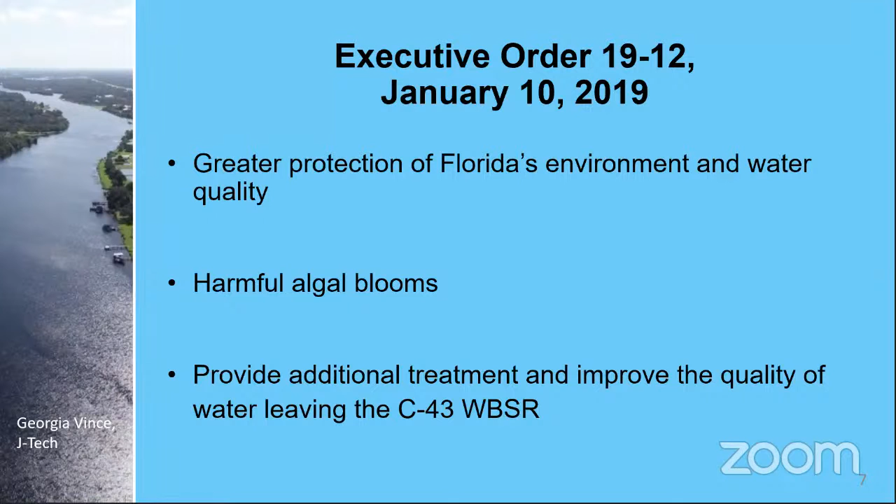The primary objective of the study is to identify opportunities to provide additional treatment and improve water quality leaving the reservoir. During the study, we identified and evaluated treatment technologies that may be implemented with the reservoir project, with the ultimate goal being to identify at least 3 alternatives.

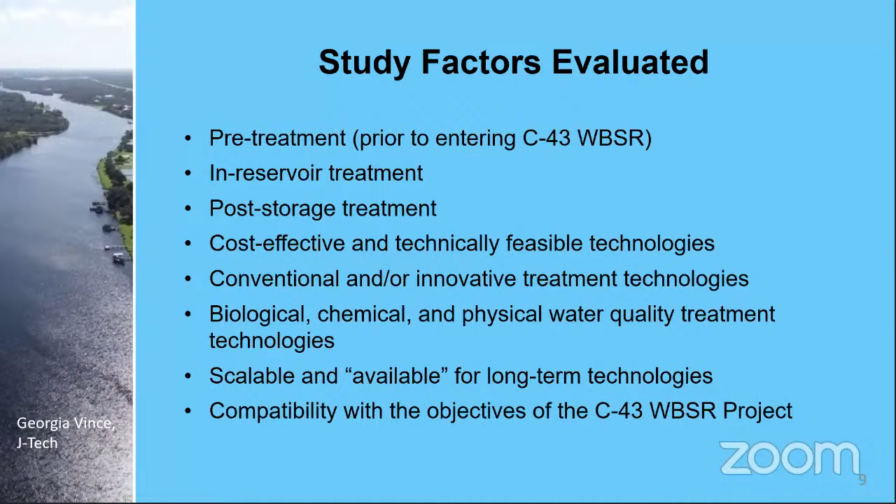The study evaluated pre-treatment opportunities prior to entering the reservoir, in-reservoir treatment, post-storage treatment, or water leaving the reservoir. We ensured the technology is cost-effective and technically feasible, evaluating both conventional and innovative treatment technologies. We considered biological, chemical, and physical water quality treatment technologies. The final alternatives must be scalable and available for long-term operation, and must be compatible with the objectives of the C-43 reservoir project.

The working group and consultant team identified constraints for the feasibility study. The identified alternatives cannot affect the congressionally approved C-43 West Basin Storage Reservoir project purposes, benefits, infrastructure, construction schedule, or operation, and the available project lands have not been specifically identified for the study. The C-43 reservoir and the selected treatment components are not intended to achieve full compliance of the Caloosahatchee River TMDLs for the basin.

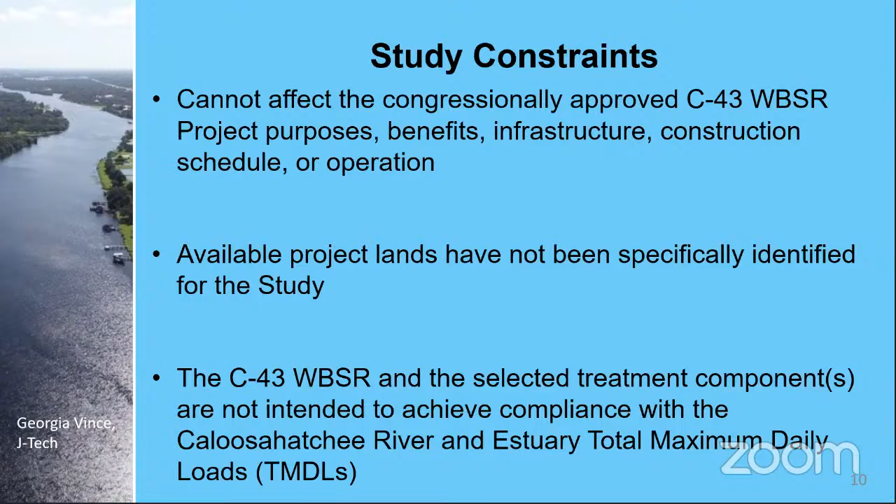The project was initiated in July of 2019, and we have had several public meetings as the project has progressed over time. We have incorporated feedback and public input from those meetings throughout the process, and we have finalized the feasibility study and will be presenting our results and next steps to you today.

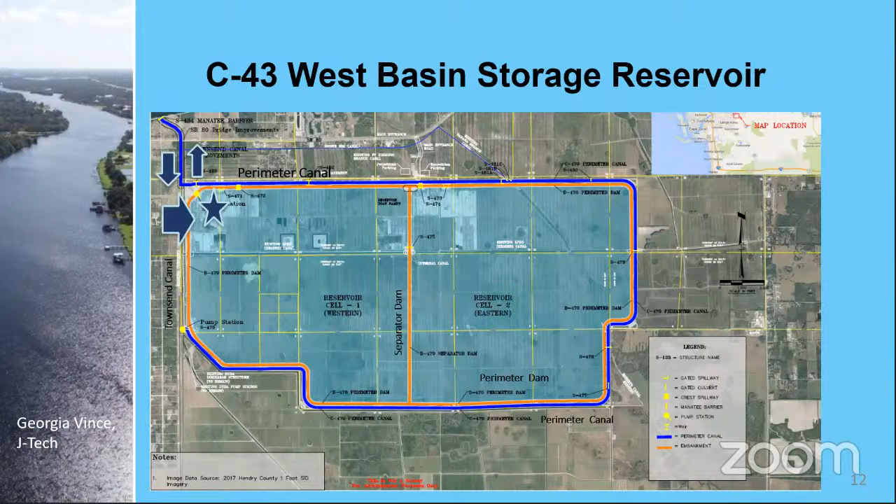A little history on the C-43 West Basin Storage Reservoir: it's a component of the Comprehensive Everglades Restoration Plan, and the project is funded by annual Florida legislative appropriations, and the U.S. Army Corps of Engineers will credit eligible project costs.

The purpose of the reservoir is to capture excess basin runoff and Lake Okeechobee releases to store water to improve the quantity, timing, and distribution of discharges to the Caloosahatchee estuary. Another purpose of the project is to maintain water supply for existing users.

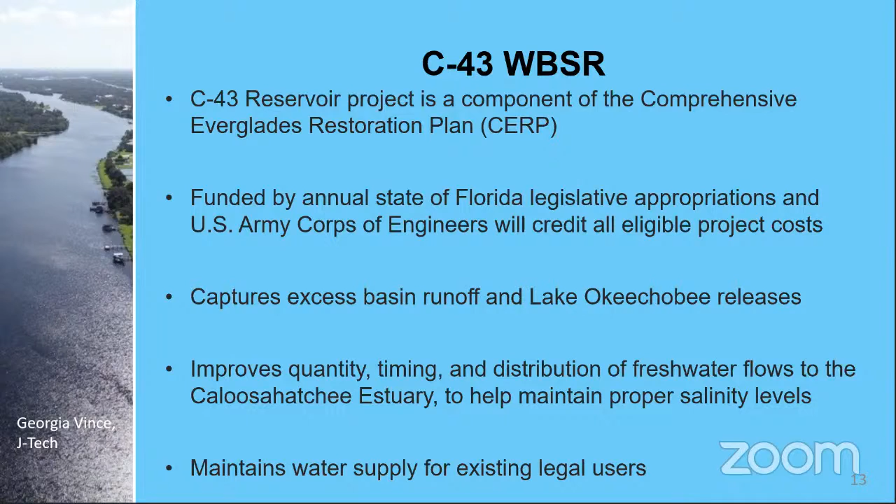The C-43 reservoir is located in Glades County or Hendry County along the C-43 river or canal west of Lake Okeechobee, between the Ortona and upstream of the Franklin Locks, just east of the Townsend Canal. This is a 10,500 acre project that will provide above ground storage.

Flows from the river will be directed down to the Townsend Canal and into the reservoir. When the river and estuary call for it, water that is stored will be discharged through the Townsend Canal and back into the river and estuary.

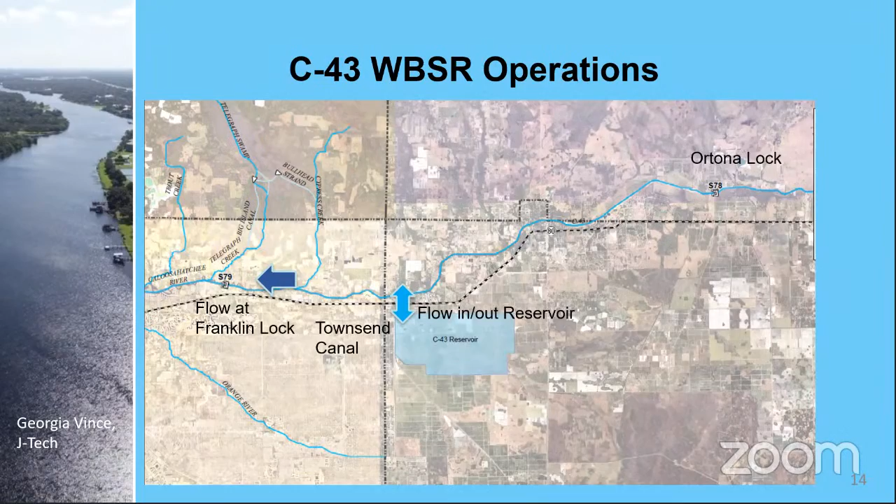Marcy Frick will now discuss treatment technologies that were evaluated for the study.

Our search for appropriate treatment technologies is focused on three primary water quality parameters: nitrogen and phosphorus, which are the nutrients that drive algae growth, and total suspended solids, which includes both algae and organic matter. Nitrogen exists in multiple forms, which vary in their availability to algae, including organic nitrogen and inorganic nitrogen that includes ammonia and nitrate. Phosphorus occurs in dissolved and particulate forms, which have different mechanisms for treatment.

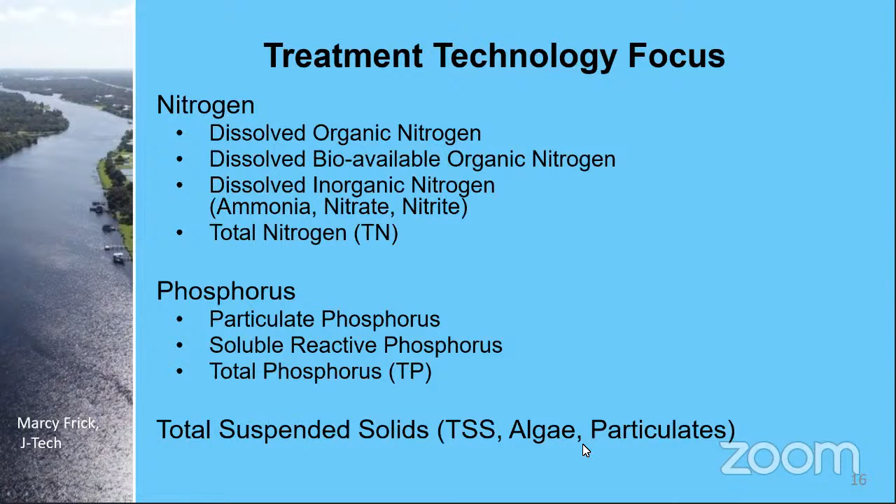Natural systems use the same chemical and biological processes for treatment as conventional systems. Where conventional systems build tank-based treatment reactors of concrete and steel and move water and add compounds using electricity and chemicals, natural treatment systems are typically land-based systems that rely upon gravity flow and natural plant, soil, and microbes to provide the media and biological habitat that sustain these processes at natural rates.

As a result, fewer staff are required to operate, and less time in the field is needed for maintenance, and monitoring processes are reduced significantly, and fewer residuals are produced. This often means lower long-term unit operational cost per pound of nutrient removal for natural systems.

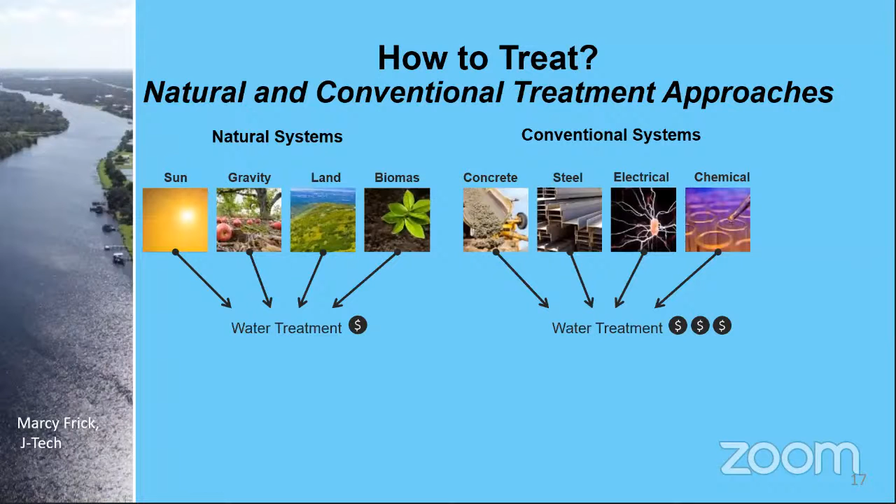For our technology evaluation, we evaluated them using key attributes. These attributes included whether Florida case studies were available and whether the data were suitable for analysis, nutrient removal data, and to what extent it could be used to scale up to treat large flows associated with the reservoir.

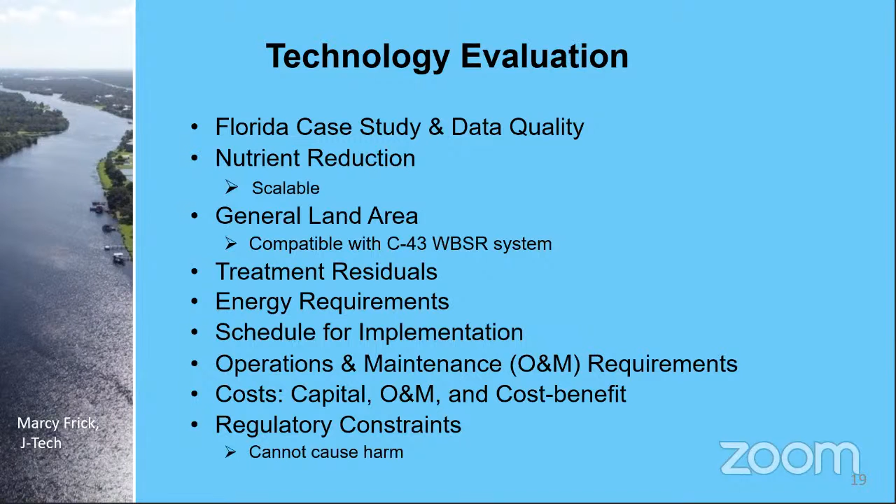The general land requirements and whether its features were compatible with the reservoir system and location, if treatment residuals are produced and how they would be managed, the amount of energy required, the schedule for implementation, operations and maintenance or O&M requirements, general costs for construction, O&M, and cost benefits, as well as regulatory constraints with the provision that the technology cannot harm the environment.

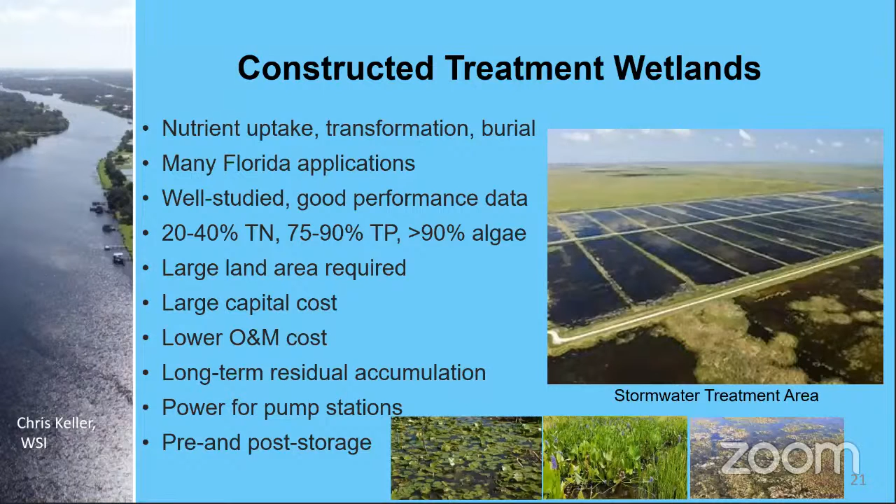Treatment wetland for the C-43 reservoir is one of the technologies that could be used either before water is delivered to the reservoir or after water is discharged from the reservoir before it returns back to the C-43.

The next technology is sand filtration, which involves the gravity separation of particles such as algae and suspended solids in the water column by forcing the water to drain through a bed of sand or other media.

Sand filtration is one of the technologies that we consider to be a passive system or a natural technology, because other than needing energy for pumping, there are no other external energy or chemical inputs required to make these types of systems work. There are a few applications of this technology in Florida. The largest is currently under construction for the phosphate industry in Central Florida.

The general removal efficiencies for total nitrogen are similar to those for treatment wetlands at about 20 to 40%. They run at about 25 to 50% reduction in phosphorus concentrations and over 90% for suspended algal solids.

Similarly to treatment wetlands, sand filtration generally requires a large land area, therefore likely to have correspondingly large capital costs for land acquisition and construction. Again, because these are a passive system and only rely on electrical costs for pumping, they have generally lower operations and maintenance costs compared to conventional technologies.

The primary operation and maintenance activity for these, besides pumping, is the periodic replacement of the upper layers of the sand every 3 to 5 years. As with the treatment wetlands, this is one of the technologies that could be applied before or after the water enters the reservoir.

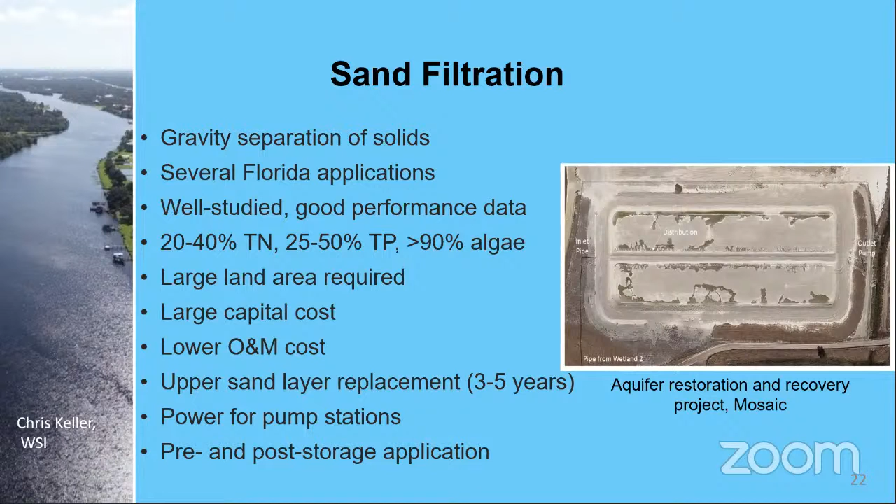The last one that I'm going to discuss is the hybrid wetlands treatment technology, which combines the physicochemical processes of coagulation with the natural settling and uptake processes that occur in treatment wetlands.

In this particular example, a coagulant such as alum, which you'll hear more about in a moment, is dosed to bond with nutrient ions and form particles that then settle out in wetland basins. There are several successful applications of the technology in Florida.

Sorry for that delay.

The removal efficiencies range from about 50 to 60% for total nitrogen, 80 to 90% for total phosphorus, and over 90% for suspended algal solids. Because they're enhanced or intensified by adding chemicals, they require reduced land area and reduced capital costs compared to constructed treatment wetlands. The requirement for chemical addition, however, increases their O&M costs in comparison to treatment wetlands. They do generate solids that require periodic removal and disposal, and these hybrid wetlands can be used to treat water either before or after storage in the reservoir.

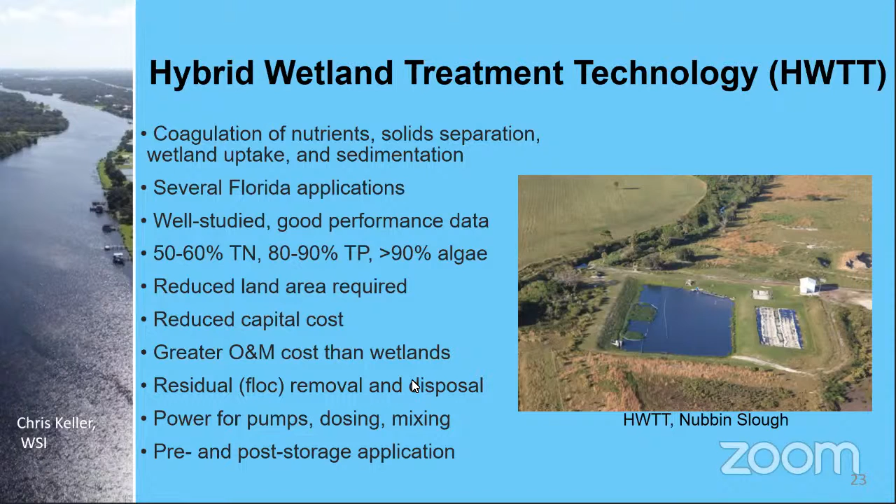With that, I'll hand it over to Jim to discuss the remaining technologies. Thanks, Chris. I'll be speaking first about alum treatment, picking up on Chris's connection there.

For coagulant treatment using alum, it's used commonly to coagulate nutrients by particle charge neutralization and solid sedimentation in offline lagoons or within the reservoir. This approach has a long and successful history in Florida and is well studied with ample performance data from full-scale facilities such as the Nutrient Reduction Facility in Lake County.

Removal rates are typically high for nitrogen, in the range of 50 to 70%, and very high for phosphorus, in the range of 50 to 90%, with over 90% algal solids removal. The land area requirement is relatively small and consists primarily of settling basins, chemical storage, and solids dewatering and drying facilities. The O&M cost is moderate to high given the continuous need for chemicals and management over time. The removed floc requires dewatering and storage, which is the largest open concern over the long term. Power is required for pumps, dosing, and mixing.

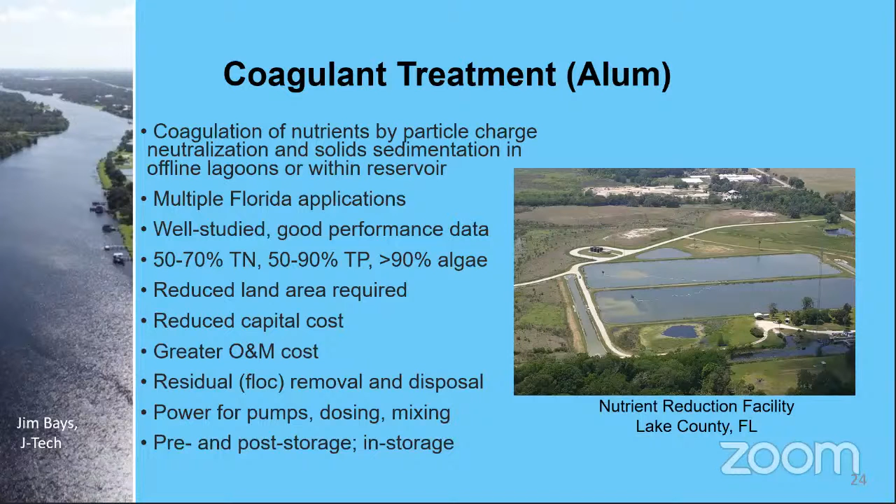The next technology is electrocoagulation. It's the same principle, but a different method of treatment. Electrocoagulation, or EC, is the coagulation of nutrients by electrode particle charge neutralization and subsequent solids sedimentation. The system is relatively new to Florida, with limited Florida case studies.

The studies have shown that this approach has consistently high removal of nitrogen, phosphorus, and algal solids, typically up to 90%. The system would be relatively compact with low land area required, but would have a high capital cost and a high O&M cost. One benefit of this approach is lower residuals production compared to alum treatment, for example, but it still generates solids that require disposal. Power requirements are high to operate the system, pumps, and related machinery and equipment.

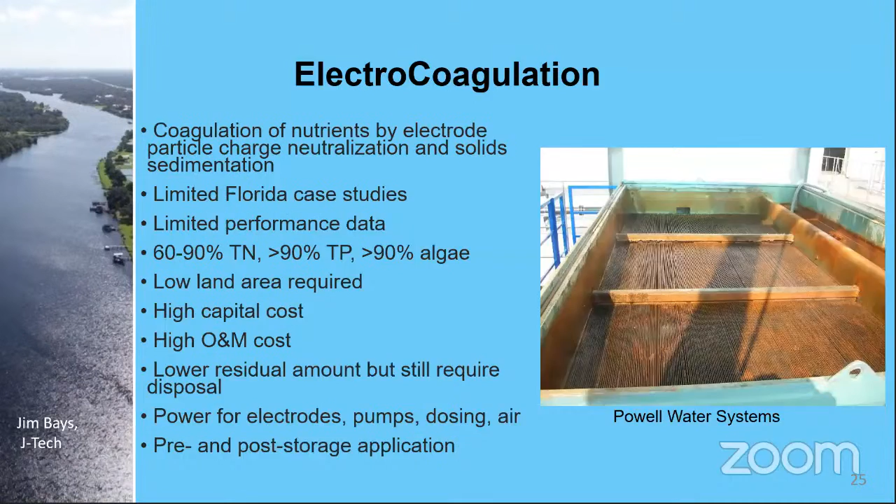Bold and Gold is a sorption media developed by the University of Central Florida that uses a mix of sand, tire crumbs, and clay particles to absorb and filter nutrients in engineered basins. There have been over 200 applications in Florida, and performance data indicate potential total nitrogen removal ranges of 75 to 90% and total phosphorus removal of 50 to 90%.

Media beds are relatively small and require a moderate area. The spent media must be replaced over time. O&M costs are relatively high because of the replacement costs, but other operational needs are minimal.

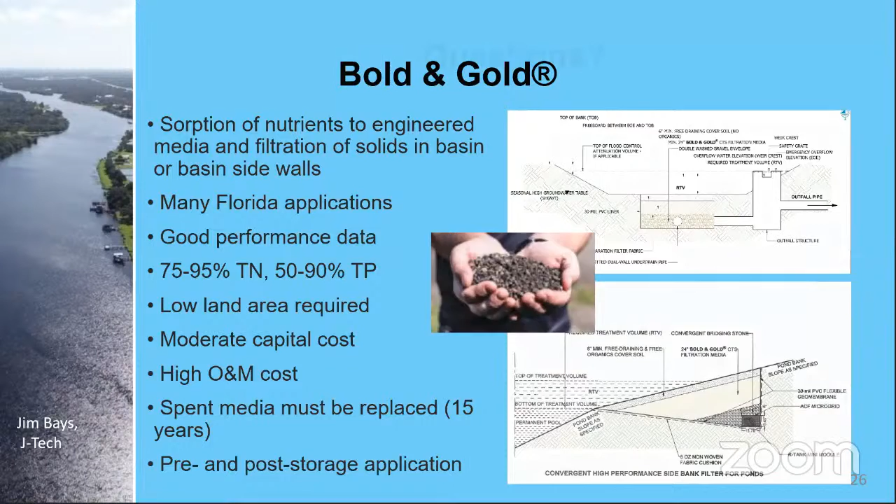And I think that's it for us on the overall technology review, and we'll take some questions now.

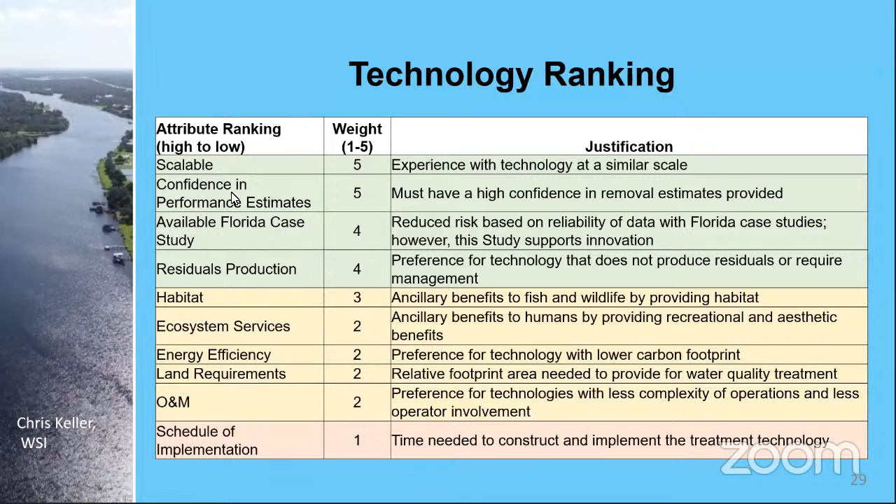So the top 10 technologies are shown there on the left-hand side, ranging from treatment wetlands down to the NutriGone media. Those attributes from the prior slide, with the same color scheme, are shown across the top of this graphic. The consulting team, with input from the working group, developed scores for each technology and for each of these attributes that range from 0 to 2, with 2 generally being the preferred, highest score, and 0 being the least.

Those scores were then multiplied by the weights to come up with the overall scores shown in the second to last column on the right. We see that treatment wetlands came out with the highest overall score at 54, ranked number one for these non-cost and non-nutrient removal attributes.

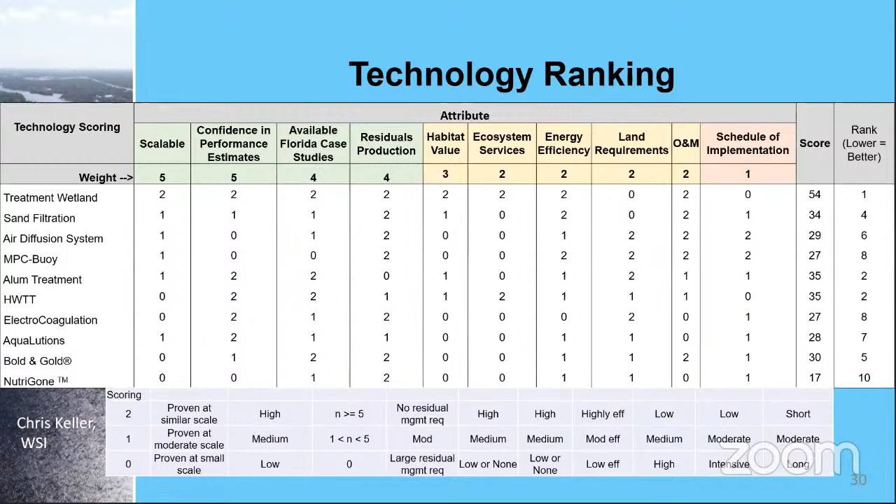Next slide. This slide presents that same information, but in a different form, with the rankings shown at the ends of the blue bars and the attribute composite scores shown by the length of the bar. So that 54 that treatment wetlands received on the previous slide is reflected in the length of that bar. You see how those individual technologies fell out, with treatment wetlands ranking first, Alum Treatment and the hybrid wetland treatment technology tying for second place, leaving sand filtration in 4th and Bold & Gold in 5th.

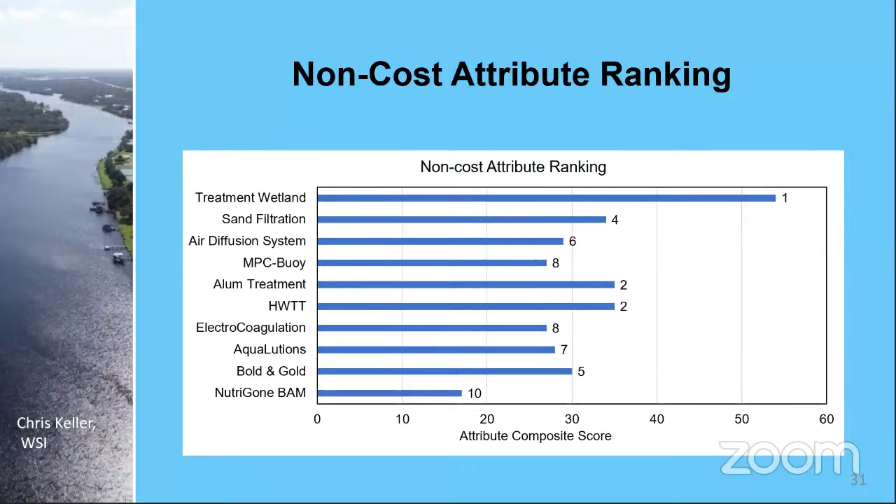Next slide. So in order to take the next step and begin to evaluate these top 10 technologies and compare them in terms of their ability to provide a necessary level of water quality treatment, the consulting team and working group developed some design objectives based on an analysis of actual historical water quality in the C-43 canal.

What the team came up with was objectives for each of these technologies to be able to reduce total nitrogen from 1.5 to 1 milligram per liter, total phosphorus from 0.16 to 0.08 milligrams per liter, and total suspended solids from 20 to 10 milligrams per liter. These improvements in water quality would have to be provided for a flow of 457 cubic feet per second.

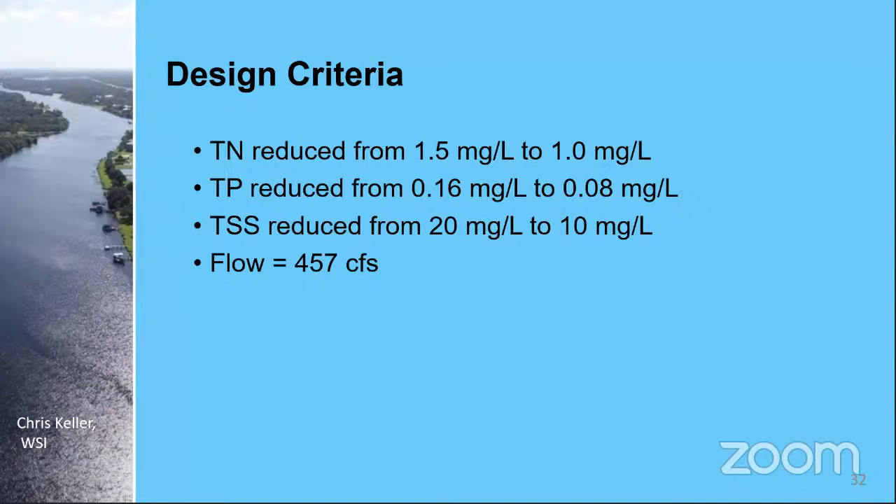Next slide. As I mentioned, each of the technologies was sized based on those design objectives to achieve those minimum design goals of reducing the TN, for example, from 1.5 to 1 milligram per liter. Total masses at those flows of 457 cubic feet per second were summed over a 20-year planning period.

And those were combined with net present value capital and operations and maintenance costs, excluding the acquisition of land and the conveyance infrastructure necessary to deliver water to each of these technologies, to develop these overall cost effectiveness values for total nitrogen, total phosphorus, and total suspended solids.

So the attribute ranks from the green, yellow, and red graphic that I showed a few minutes ago are there in the second column, and the cost effectiveness for each of the water quality parameters of interest, total nitrogen, phosphorus, and suspended solids, are shown in the next three columns. The combined overall ranks, including cost effectiveness and the attribute rankings, are shown on the right-hand side.

In this case, we see that alum treatment ranked first, treatment wetlands second, hybrid wetlands third, Bold and Gold and sand filtration coming in fourth and fifth, and the rest of the technologies there in 6th through 10th place.

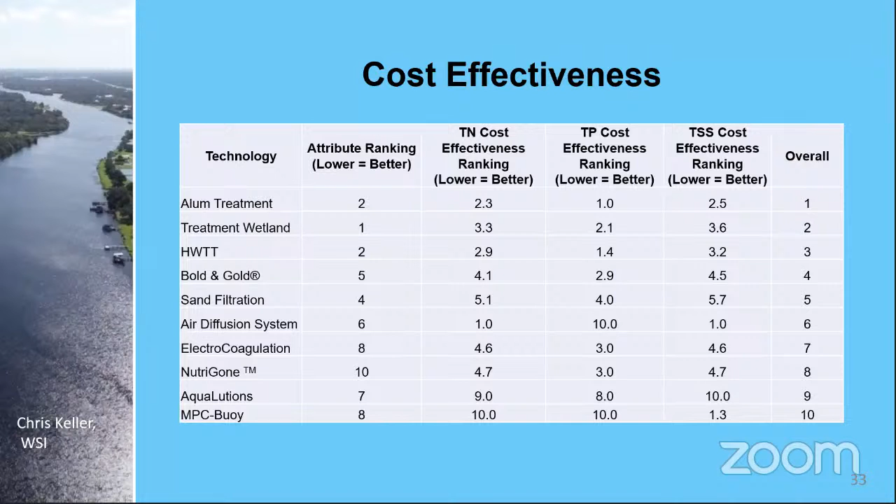Next slide. This is another presentation of that same data from the prior slide, but in this case looking at more of a scatter plot, where the attribute ranks, those non-cost, non-nutrient removal attributes, the composite score for those, are shown on the x-axis, the bottom scale, and the nitrogen cost effectiveness ranking, nitrogen being the key parameter of interest in the C-43 watershed, shown on the left-hand side.

So the take-home message from this slide is that those technologies that fall in that lower left quadrant, with low dollar per pound numbers for nitrogen removal and high rankings, being the lower scores for those other attributes, are the preferred technologies. Again, we see that the wetlands, alum, hybrid wetlands are firmly within that lower left quadrant, and the Bold and Gold and sand filtration are right there on the edges.

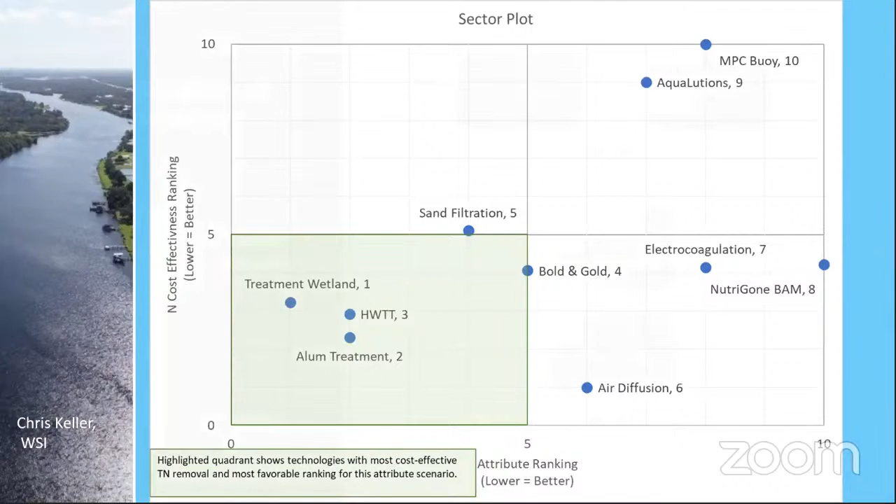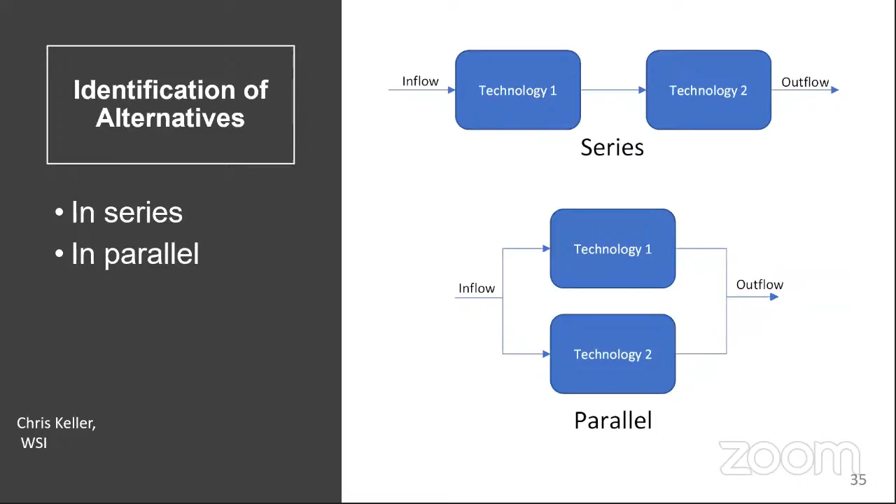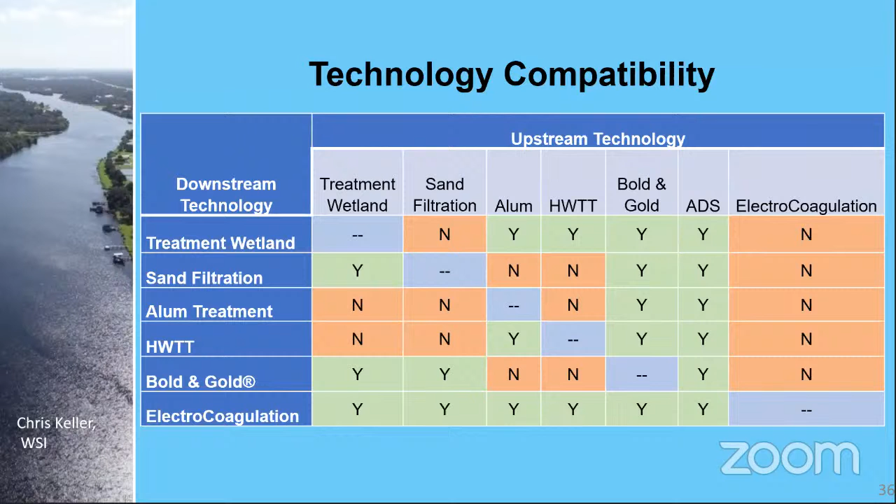So what we see here is that the alum treatment going across the top, towards the middle, where alum is shown in gray, the team felt that alum could be followed by a treatment wetland, or by a hybrid wetland system, or by electrocoagulation, but there wasn't any significant benefit in following alum treatment with either sand filtration or Bold and Gold. So that's kind of the approach to looking at the data in this chart.

So from the attribute ranking analysis we just showed there, we found that the STA, alum, and hybrid wetlands technologies achieved a balance of nutrient removal effectiveness while meeting desirable characteristics as a technology. However, there were other considerations that we knew were important. For one, is there enough land to meet the STA performance? And is there an opportunity to incorporate other innovative technologies, such as in a parallel or series combination?

So this led to the creation of combinations of technologies. For one combination, we proposed a treatment wetland to treat a portion of the flow and a Bold and Gold treatment bed to treat the remainder. So that would be a parallel configuration. This combination was sized conceptually as 1,000 acres for an STA, which was thought to fit within the known available area and would treat 20% of the target flow, and 104 acres for a Bold and Gold treatment system to treat the remainder.

Similarly, we considered a sand filter to replace the treatment wetland, which was estimated to be 200 acres, coupled with 104 acres for Bold and Gold treatment. And the intent of these technologies is to really drive to a passive operation, or as much of a passive operation as possible, while still meeting the performance. Finally, though, we did want to include EC into the considerations because of its high removal effectiveness, and it's perhaps the most highly controllable treatment system of all the technologies we've looked at here.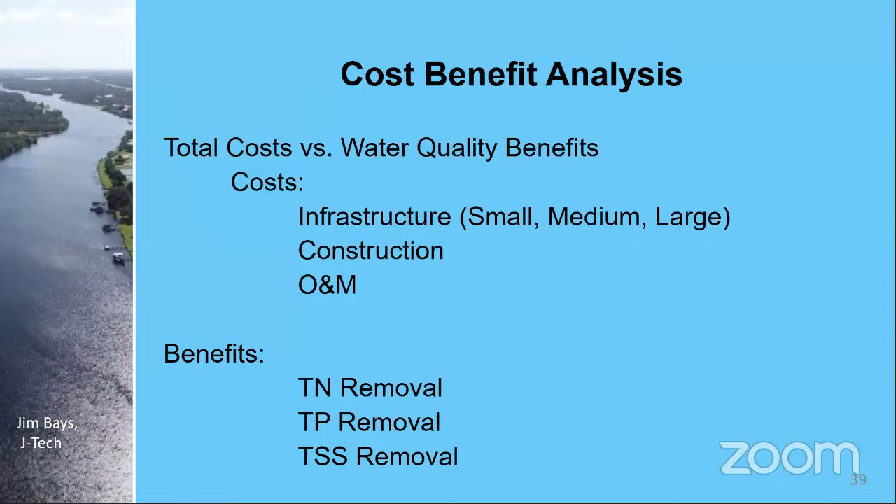This table shows the capital cost, annual O&M, and the net present value of the infrastructure cost. Capital costs range from $47.8 million for the hybrid wetlands to $164 million for the EC system. Operational costs showed a different trend, with wetlands and sand filter combinations having the lowest O&M costs in a range of $1 to $2 million, to $8.5 million per year for the hybrid wetlands. So that reflects the more passive operation of the wetland concepts and the lower cost associated.

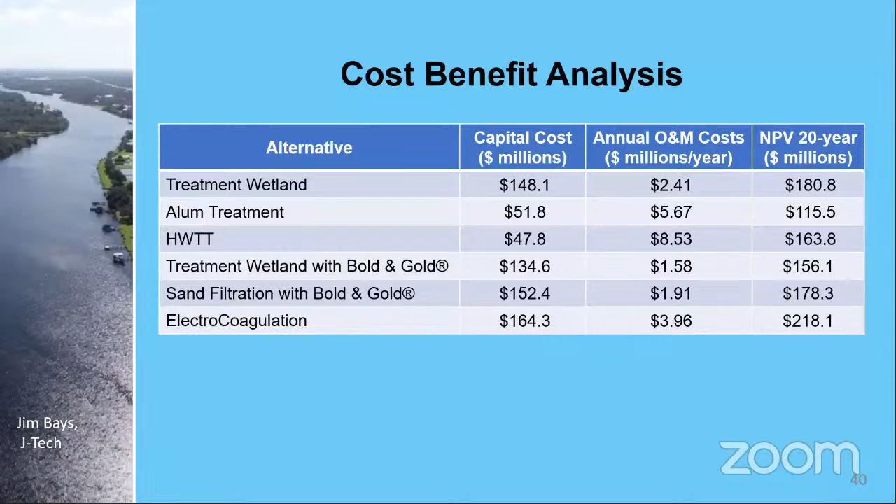We also factored in conveyance infrastructure costs, where we proposed that pump stations, conveyance channels, and access roads to support the treatment technologies would have 3 levels: small, medium, and large. Capital and O&M costs were summed over a 20-year period and annualized, and net present value costs ranged from $115 million for alum treatment to $218 million for the EC treatment. So these are long-term, 20-year accumulations of cost of the construction, the capital, and the construction includes the treatment system as well as the conveyance infrastructure.

Okay, this table shows the 6 alternatives compared by area, flow, and 20-year net present worth unit removal cost. The largest area requirement is for a full-scale STA at 5,000 acres, and the smallest is for alum treatment at 50 acres, with EC coming in close behind at 150 acres. The treated flows range from the analysis objective average of 457 CFS for the STA, alum, and hybrid wetlands, down to 325 CFS for the Bold & Gold alternatives, and the lowest flow at 229 CFS for EC. This difference in flows between technologies is because the technologies show greater removals than we specified. That is, they'll get to lower concentrations than we're targeting, given what we know about their performance. So those greater removals mean a commensurately smaller flow is treated, which is then blended with remaining flows. So we're really treating a side stream here to get to our total target outflow concentrations in our analysis.

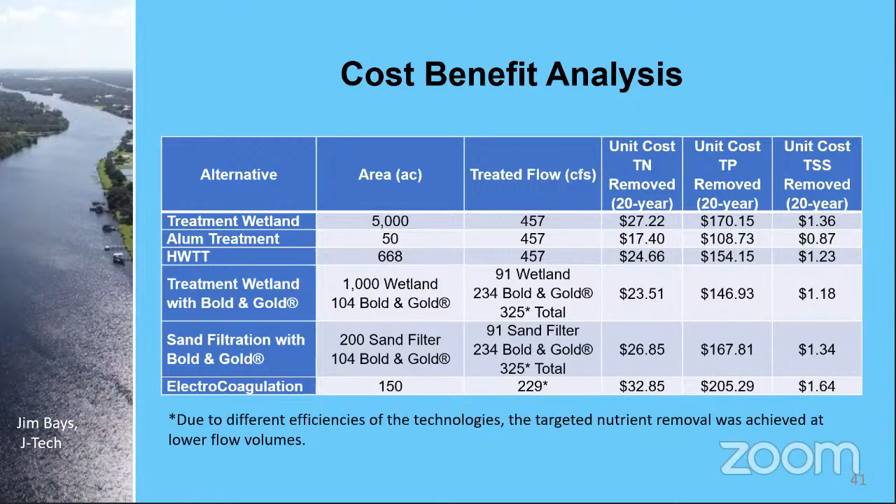This slide shows the unit cost data for each parameter in 3 graphs, with nitrogen at the top, phosphorus in the middle, and solids at the bottom. Each graph shows the unit cost data ranging from highest to lowest, top to bottom. Total nitrogen, the blue bars, ranges from $17 per pound removed for alum treatment to $33 per pound removed for EC. Total phosphorus, the orange bars, ranges from $109 per pound removed for alum treatment to $205 per pound removed for EC. Remember, this is the long-term capital and O&M cost over a 20-year period. Total suspended solids, the gray bars, range from 87 cents per pound removed for alum treatment to $1.64 for EC. So clearly the highest unit costs are with phosphorus removal.

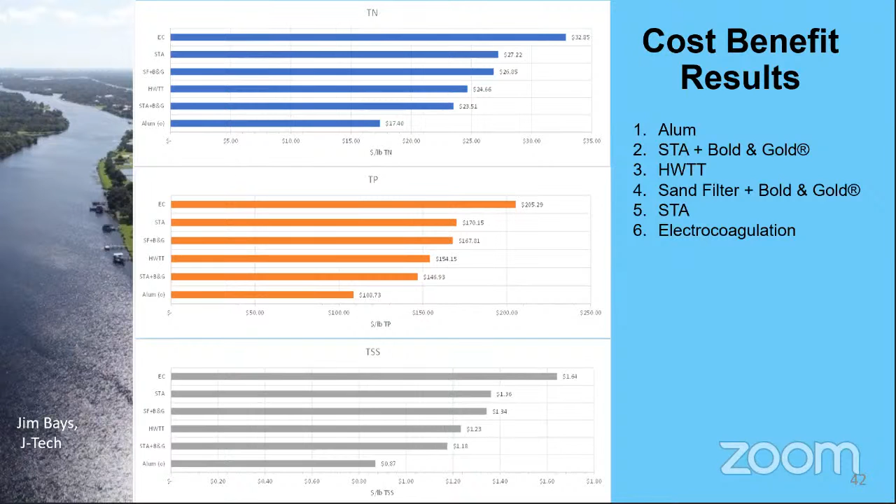The nitrogen ranges are lower than that. Alum treatment consistently showed the lowest unit cost, and these numbers are consistent with other operating systems, with a relatively large difference in unit costs between the other technologies. That is, alum is, generally speaking, significantly lower than the other costs. EC, electrocoagulation, proved to have a consistently higher unit cost over all the other technologies, even though it is a substantially more controllable system, and the operations can be more specifically defined for it.

Based on this analysis, alum treatment was ranked first, followed by a treatment wetland with Bold & Gold and hybrid wetland treatment technology, and then a sand filter with a Bold & Gold treatment bed. This set of alternatives represents technologies with proven track records, such as alum treatment and treatment wetlands, but supplemented with relatively new technologies such as hybrid wetlands and Bold & Gold. The relatively lower unit cost for alum treatment is consistent with actual performance of full-scale facilities, and a smaller footprint is required. The relatively greater unit cost for the remaining technologies are fairly similar, and land area requirements are considerably greater. So this is our recommended alternatives moving forward.

Okay, Georgia. Thanks, Jim.

We did get a question about alum toxicity in the receiving water body, and we've included some additional information in the feasibility study regarding this topic, as we receive this question often. I wondered if you'd quickly address that toxicity question. That is a fair question, it's been consistently raised over the years, but the operational history and performance of existing full-scale facilities operating at similar flows or concentration ranges don't show any toxicity impacts, and the concentration and dosage can be managed to prevent that from happening. It is definitely a consideration. The water chemistry of our water to be treated here also minimizes that potential, but it is our intention in the basis for the plan that we would not achieve toxic concentrations, and it would be managed to prevent that.

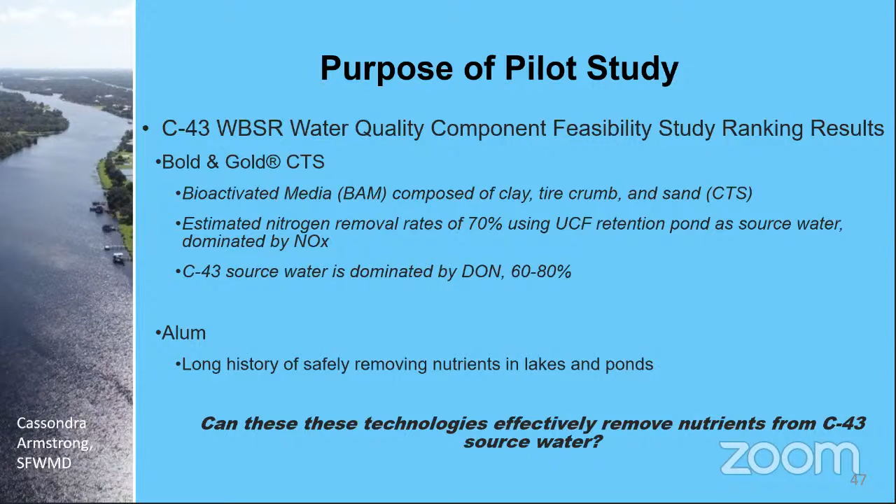For the Bold & Gold study, we used 6 of the mesocosm tanks out at BOMA. We filled 2 of those with the Bold & Gold media, 2 with sand only, and 2 are controls, which I'll explain in a bit. We then applied a continuous flow of the C-43 surface water to each of the tanks for about 1 month at a flow rate of 0.005 gallons per minute per square foot.

Now this is an order of magnitude lower than what Bold & Gold was using in the feasibility study. They had a 0.05 gallon per minute rate, so we're at a lower flow rate than that, so keep that in mind. We took very frequent, almost daily samples to try to capture what the nutrient removal efficiency curve might look like for this technology over time.

We were informed by the makers of Bold & Gold that there is a 90-day efficiency spin-up, so the initial performance of this technology is not likely to be its optimum performance. So also keep that in mind. What we are looking at here is just the first month, to try to see if it's improving with time. It'll represent the first flush of the system, like what it does when it's very first installed and implemented.

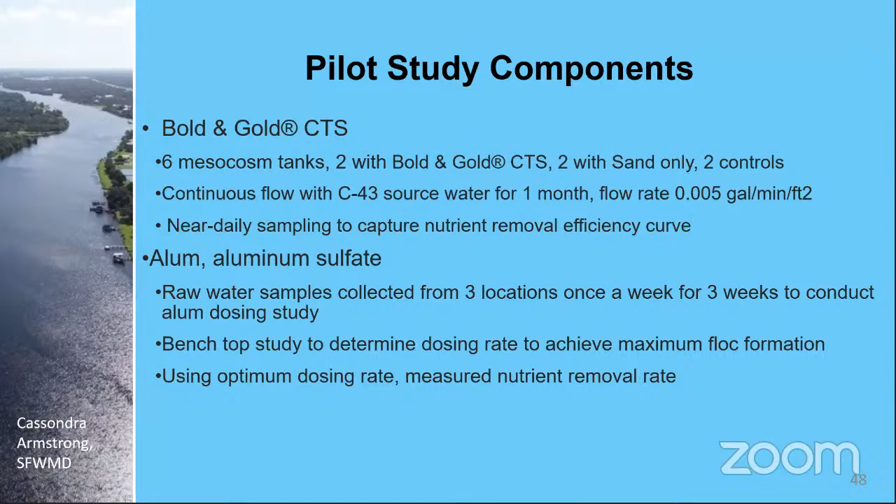The other technology we looked at was alum. We collected samples from 3 different locations within the watershed, at 3 different times, and sent that to a lab to do a benchtop study, what they call a jar study, where they tried to find out the appropriate dosing rate for the alum. Once they found the appropriate dosing rate, we determined what the nutrient removal rates were for that dosing. Let's go ahead and go to the next slide.

However, over the course of our 1-month time period, there were no lake releases at that time, so the BOMA site also represents what the watershed water component looks like. Go ahead and go to the next slide.

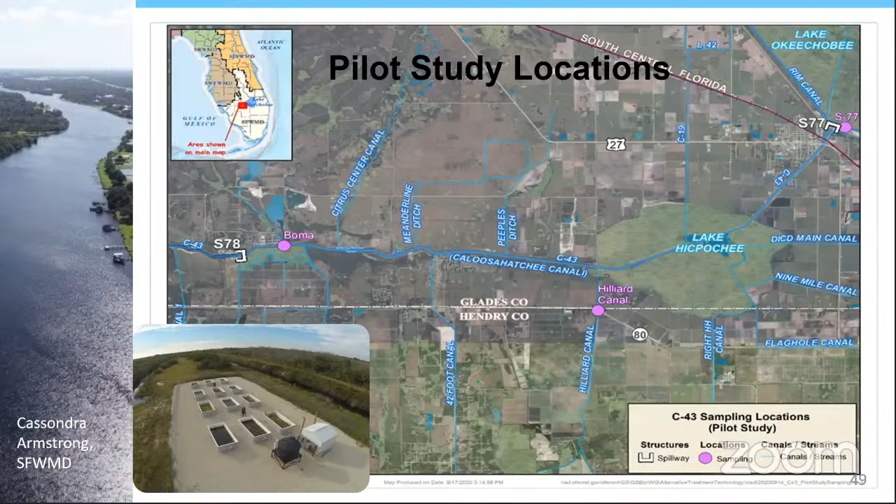For our control, this is where we stopped construction; it's just the red river rock and the geofabric on the bottom, and then we put the water into there, and that's our control. For the sand mesocosms, we put in 3 feet of sand on top of that geofabric, tamped it down so it was a nice tight density and consistency across the whole tank.

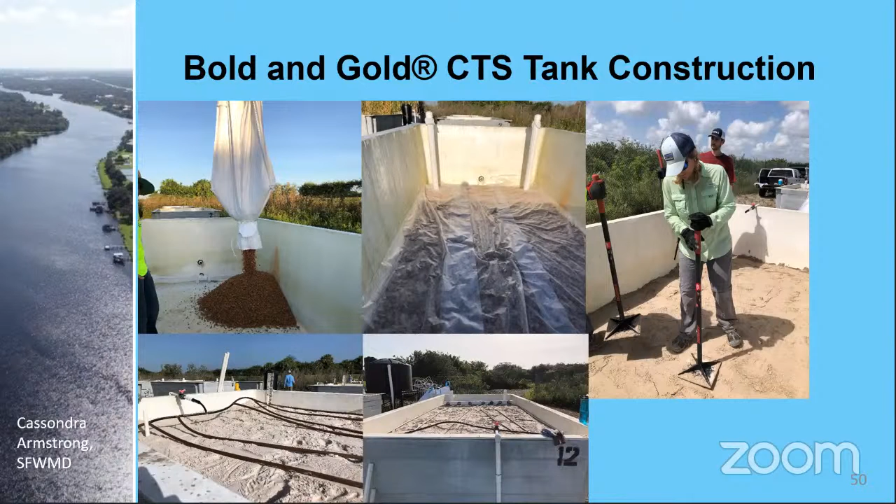For the Bold and Gold, it was 2 feet of Bold and Gold material capped with 1 foot of sand. The sand and the Bold and Gold were obtained from the same place, so it was all the same material throughout.

Once they identified the dosing rate, they took that water and analyzed it for the nutrients removed from the system. One thing to know is that the alkalinity of the water is very important. You need enough alkalinity to accommodate the alum dosing, because the alum dosing will actually lower the pH. Fortunately, the C-43 water was found to have adequate alkalinity to buffer the alum dosing.

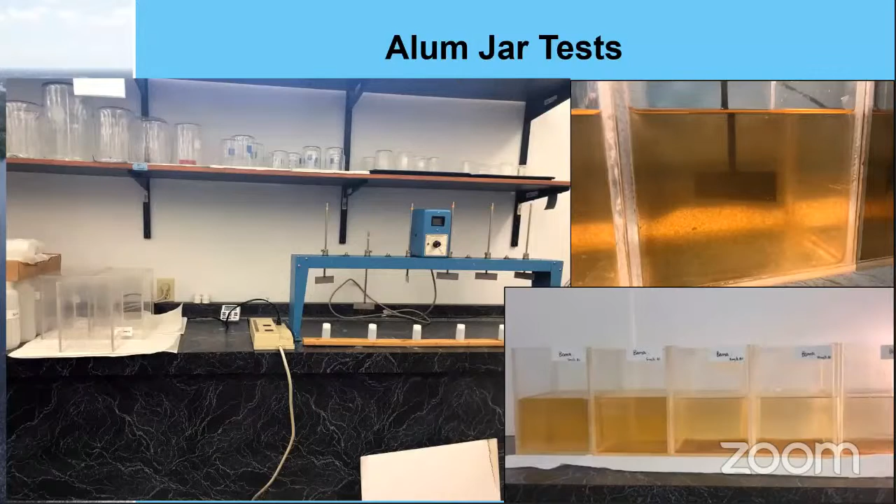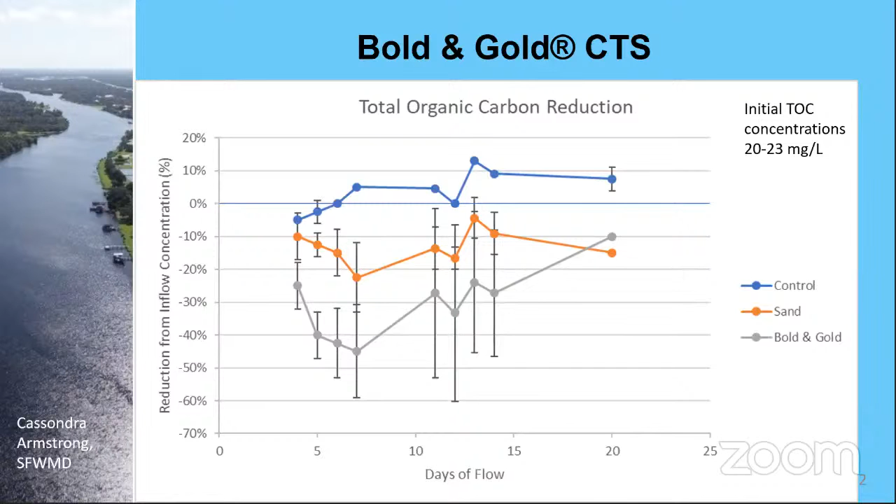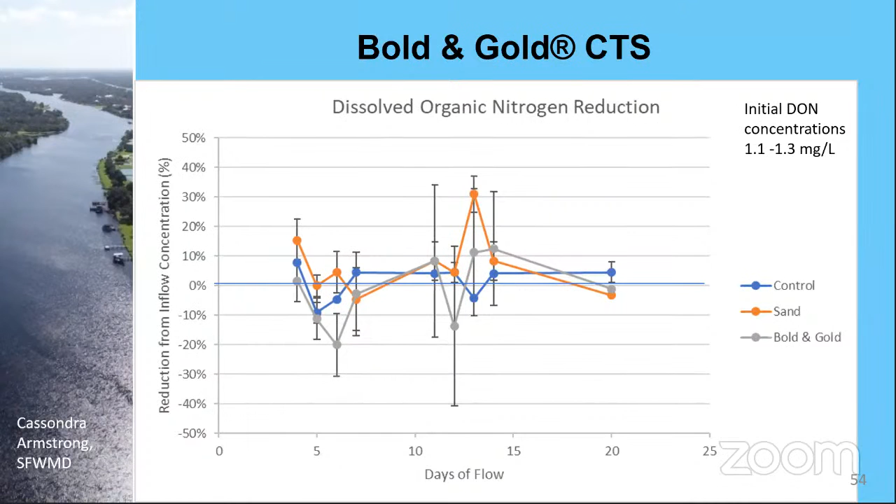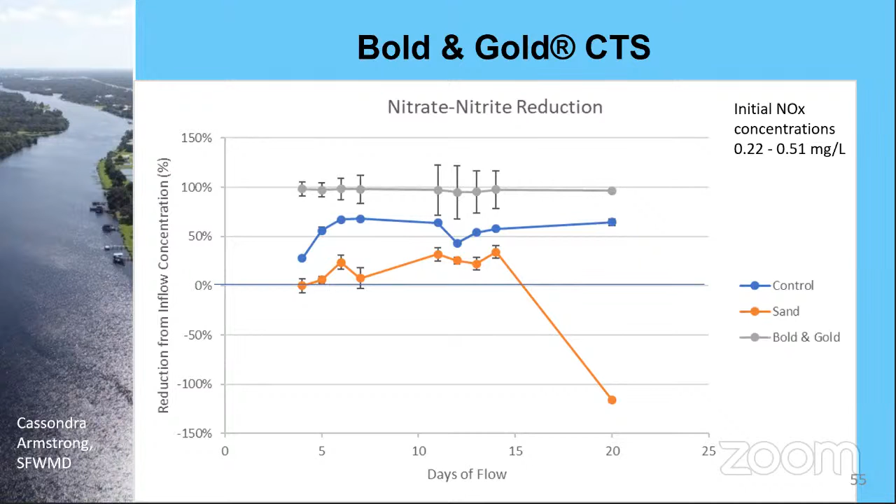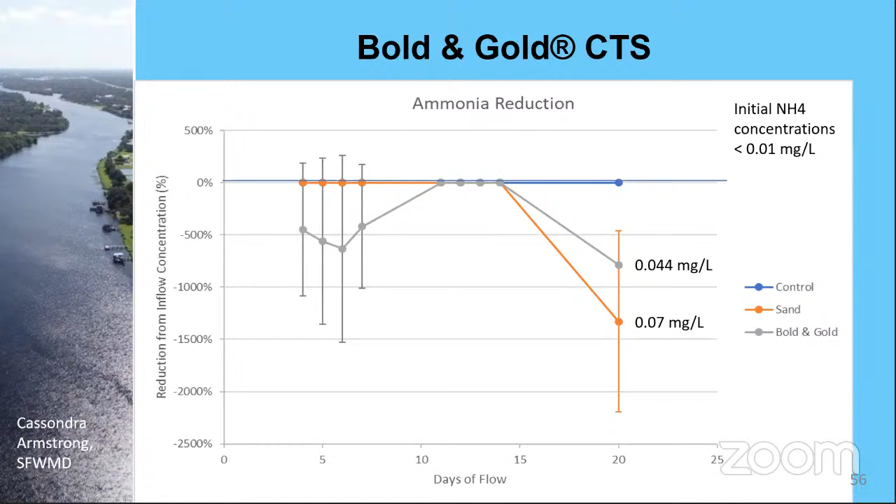So go ahead and go to the next slide. And for particulate phosphorus, we actually had a little bit of signal. We didn't have enough chemical signal to detect it in the carbon and the nitrogen, but for phosphorus, we did.

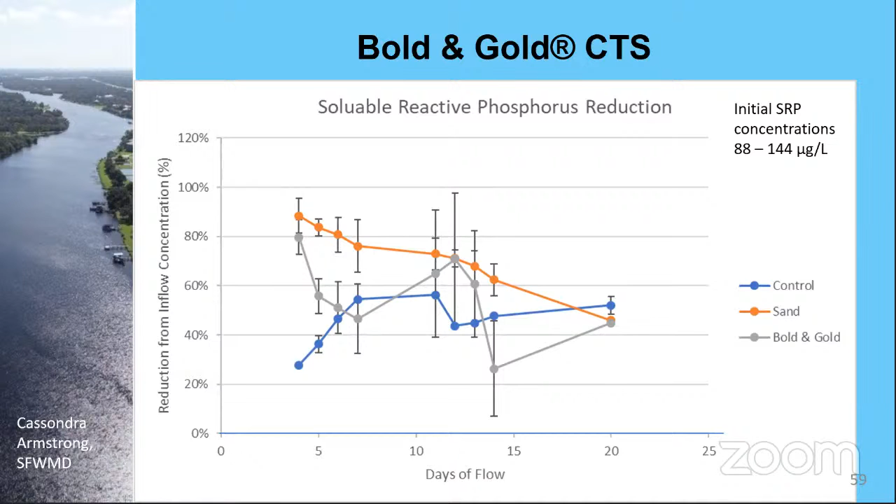So these are the results for the alum dosing. It's a lot of data here, but the one thing I'd like you to focus on is the actual columns, TOC, TN, TP, because there was very little difference between the sites. All of the sites generally had about the same amount of nutrient removal regardless of day, regardless of site. So primarily just focus on the columns because that's where the important information is.

So for total organic carbon, we had between 48 and 72% of the TOC removed with alum. For total nitrogen, the range was 27 to 61%, which is pretty impressive and in the range presented in the feasibility study. Particulate nitrogen, we didn't really have a lot of signal for that except for three times, and that ranged between 65 and 89% of particulate nitrogen removal.

And then DON, the chemical I was most concerned about, we actually had quite an impressive removal rate, between 43 and 72% of the DON was removed. This is much higher than a biological system can do, so that was very impressive. The nitrate actually had a little bit of increase in concentration, so it was not removed, it was produced. That's why the negative numbers. It wasn't that high, but there was an increase in nitrate.

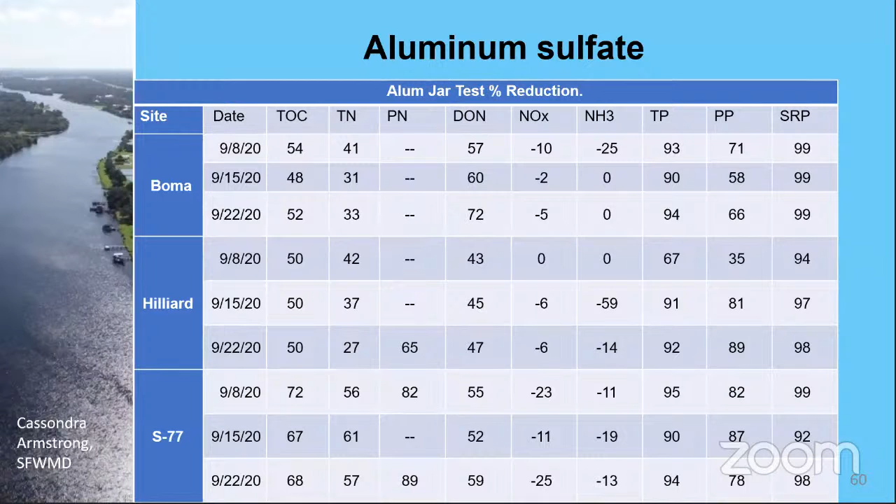And ammonia did the same thing; there was an increase in concentration for those two parameters. And for all of the phosphate parameters, we're mostly in the 90s, close to 100% removal for all of the different phosphorus species. So the alum was very effective at removing the nutrients of concern. Go ahead and go to the next slide.

So conclusions from this really quick 1-month pilot study: Bold and Gold did a fantastic job removing nitrate, close to 100% for the duration of the study. Total nitrogen removal was slightly higher than the control in the sand, averaging about 30%.

There was no effective removal of dissolved organic nitrogen. There was an increase in total organic carbon, ammonia, and particulate phosphorus, and it may be very sensitive to flow disruptions. That was one of the things the vendor mentioned when constructing these, that he wanted continuous flow, which we were originally supposed to have. So evidently this is a known issue for them, needing continuous flow for this technology to work efficiently. And we are not within their 90-day window of optimum performance.

We're only in that first 21 to 30 days. So the data presented here does not reflect what they would have put together for the feasibility study. Go ahead to the next slide.

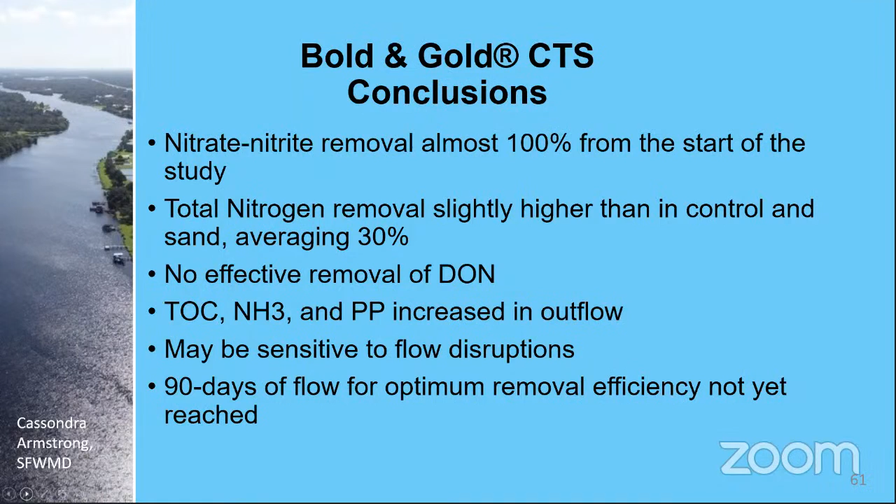For the alum dosing, it was very effective at removing carbon, nitrogen, and phosphorus from the different source waters. It had a very high effective removal rate, averaging 54% for dissolved organic nitrogen. There was some increase in ammonia and nitrate concentration, and the alkalinity was sufficient to buffer the pH. However, the lake water had less capacity.

They recommended dosing not go above 12 milligrams of aluminum per liter. After that, the pH started to fall below 5. So something to consider when looking at the operation of the reservoir is the timing of when the treatment will be applied, because if we're pulling water out of the C-43 that is dominated by lake water, that may affect the amount of dosing that can be done, as opposed to water coming primarily from the watershed.

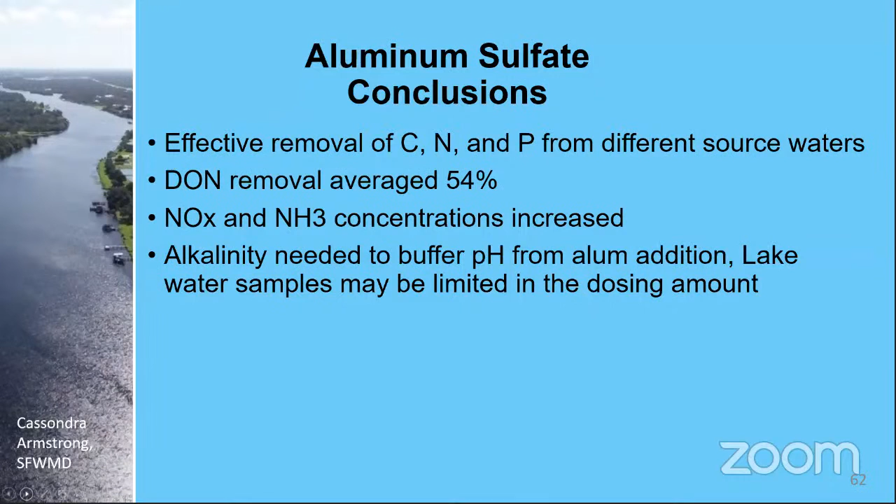Fortunately, we were able to secure additional funds, and we're going to run this project through September of next year so we can get a full year of data instead of just one month. This will allow us to capture that 90-day optimum nutrient removal, so we'll be able to see what this technology is supposed to look like when performing at its optimum.

We're in the process of collecting biweekly samples. In fact, they're out there right now getting this week's samples. This will also allow us to look at the differences between dry season and wet season performance, as well as changes in temperature, storm frequencies, and lake releases.

One thing I was really interested in doing was taking a look at the effect of the tire crumb, because one thing we noticed while collecting samples is that the water coming from the Bold and Gold tanks smelled different, like a hydrocarbon type of smell. So we've added testing for total PAHs, a common chemical that runs off of tire crumb, and we're also adding heavy metals that are common runoff from tire crumb, so we can see what effect that tire crumb has on water quality from a heavy metal and hydrocarbon perspective.

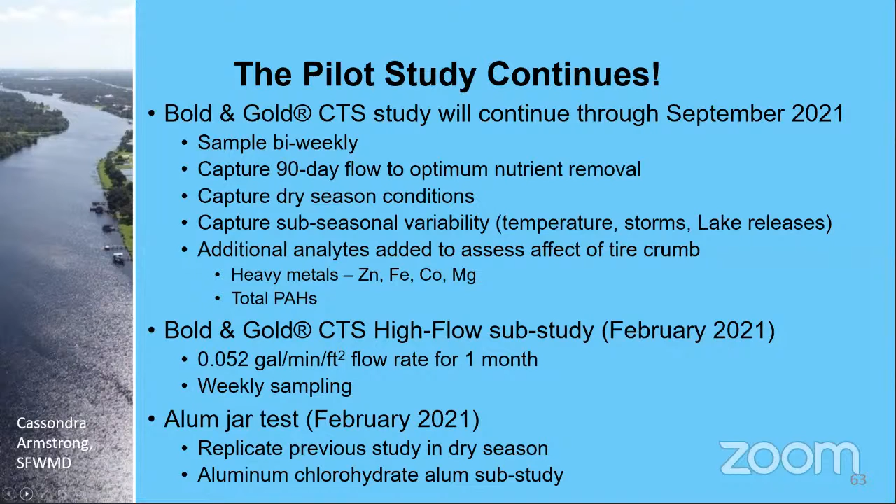And then lastly, we're going to redo the aluminum jar study test. Originally we were using aluminum sulfate. We're going to also test aluminum chlorohydrate to see if the two different types of alum behave differently in their ability to remove nitrogen. Doing this second test will also allow us to look at the difference between dry season and wet season. And I think that's my last slide.

Yeah. Are there any questions for me?

We do have a couple questions that have come in. So the first question is, what micron size is the geofabric?

Oh, that's a really good question that I do not have an answer to. It is very porous, but water can move through it freely, sand cannot. So whatever that is, I will have to check that out. I'm not sure the answer to that one.

No problem. So the next question is, given that the pilot study was only performed for 30 days, would you consider the results for the Bold and Gold and Sand study inconclusive thus far? If not, is it your opinion that the performance reported by the vendor isn't as effective as stated?

Right. So yeah, this is definitely just a first flush of what the technology might look like right after it's installed. We need to continue to do it to get past that 90-day point where they say optimum performance is actually reached. So yeah, we're going to continue on. Right now, the information we've gotten is not conclusive and does not represent what was put together for the feasibility study.

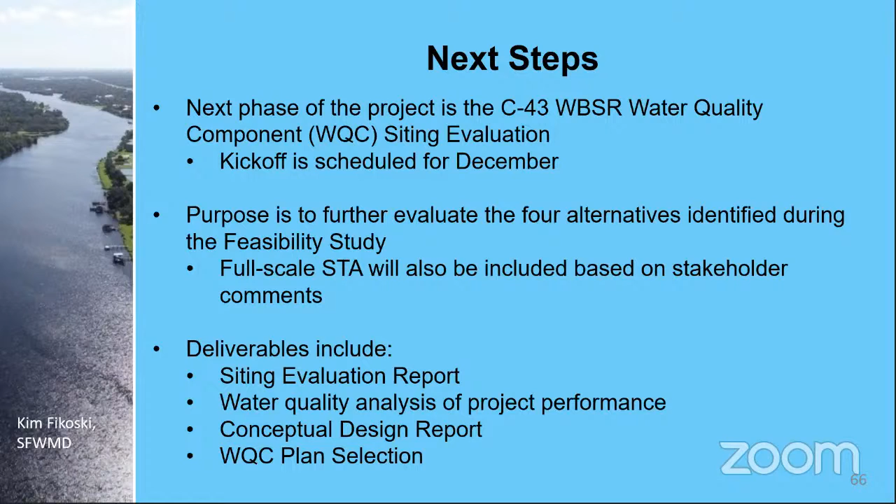All right, hi, I'm Kim Fikoski. I'm the district project manager for this project, and we'll be kicking off the next phase of the project, which is going to be called the C-43 Reservoir Water Quality Component Siting Evaluation in mid-December. The objective is to select one water quality component plan for the C-43 reservoir from the 4 treatment alternatives identified in the feasibility study. Based on stakeholder input, we'll also evaluate the potential for a full-scale STA.

Our consultant team, JTech, the local governmental working group, and district staff will evaluate land availability and project location, water conveyance, routing, and infrastructure needs, further water quality analysis of project performance, and then develop detailed conceptual plans and corresponding cost estimates for each of those conceptual plans. That information will be utilized to find the final water quality component plan that we'll select for future design. Next slide.

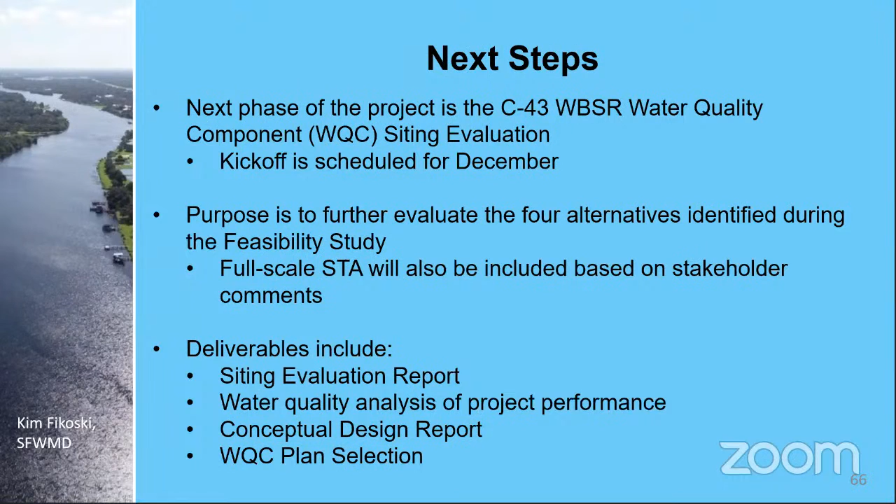As always, public meetings will be held to keep everyone informed. The meetings will be after the draft siting evaluation report and after the water quality component plan selection. The siting evaluation will be completed in 9 months, and if funded, the selected water quality component plan will move forward to detailed design under a separate contract. The overall goal is to have construction completed and online concurrently with the full operation of the C-43 reservoir.

I wanted to thank our JTEC WSI consultants, the local governmental working group, and our district staff for their dedication on this feasibility study, and I look forward to working with all of them in the next phase. I also wanted to thank the public for the studies you've submitted and the excellent questions and comments you've provided during these public meetings. You've stimulated our team's meeting discussions, and you've enhanced our teamwork product.

I'll now turn it back over to Georgia for the Menti portion, where you can continue to provide us with your questions and comments for this phase as well as the next.

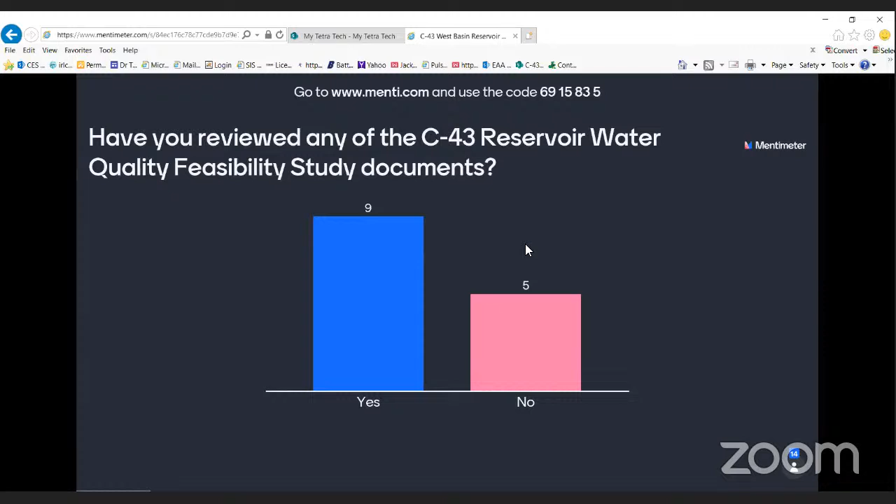The good news is a lot of you have looked at our study documents. As Kim mentioned, we've had a lot of comments, questions, and input from the public, so we certainly appreciate that. I'll give it a few more seconds for people to get logged in and provide your response.

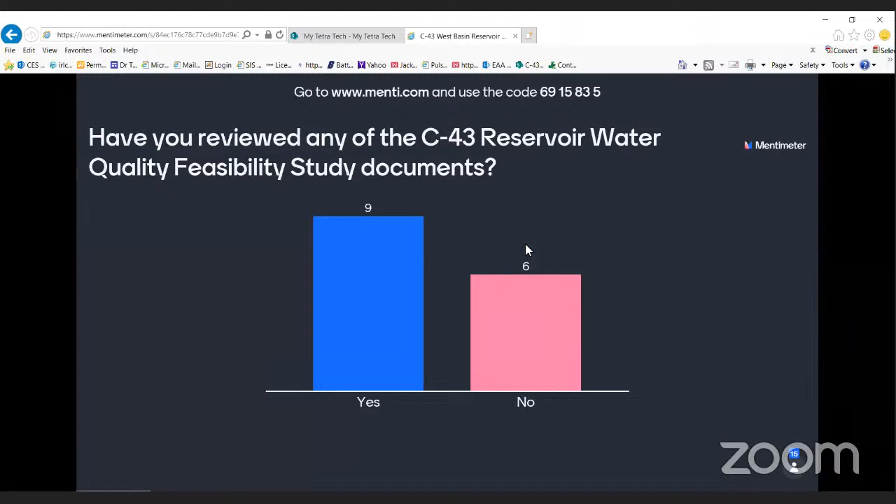All right, so the next question is: list one or two words that immediately come to mind when you think of the water quality treatment for the C-43 reservoir.

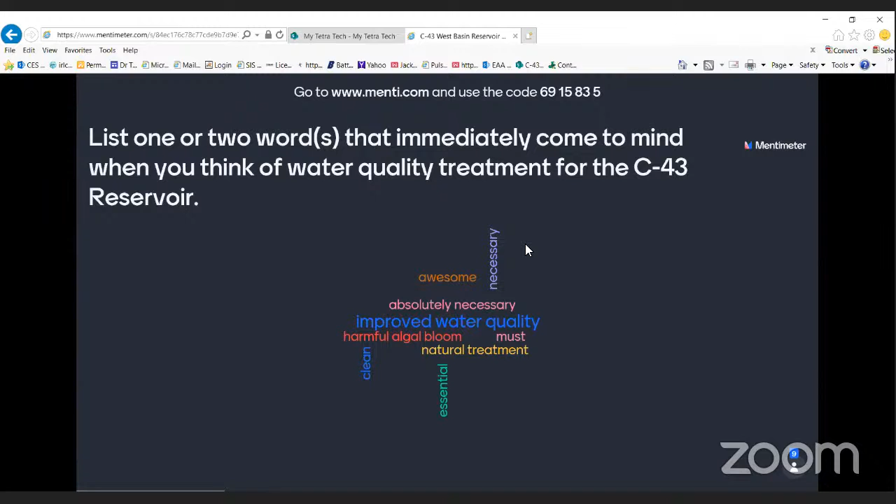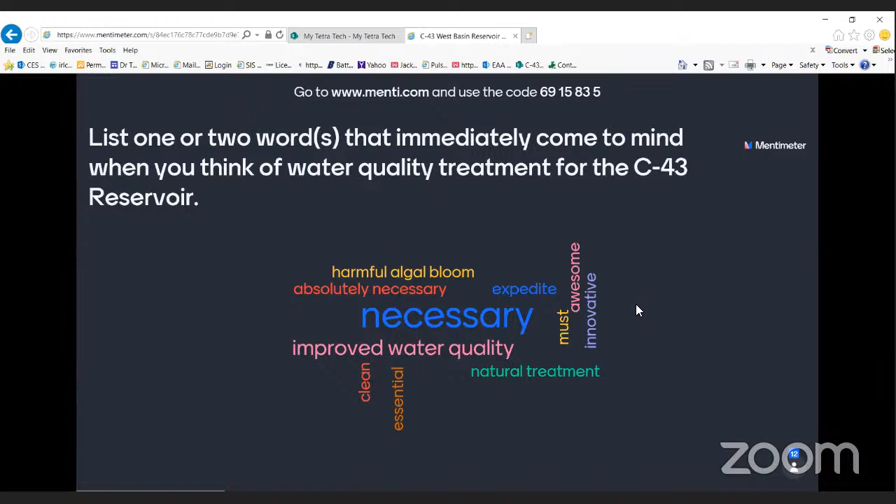Okay, great. And just as a reminder, all of these results will be saved and posted to the project website after the meeting, so you can review our results.